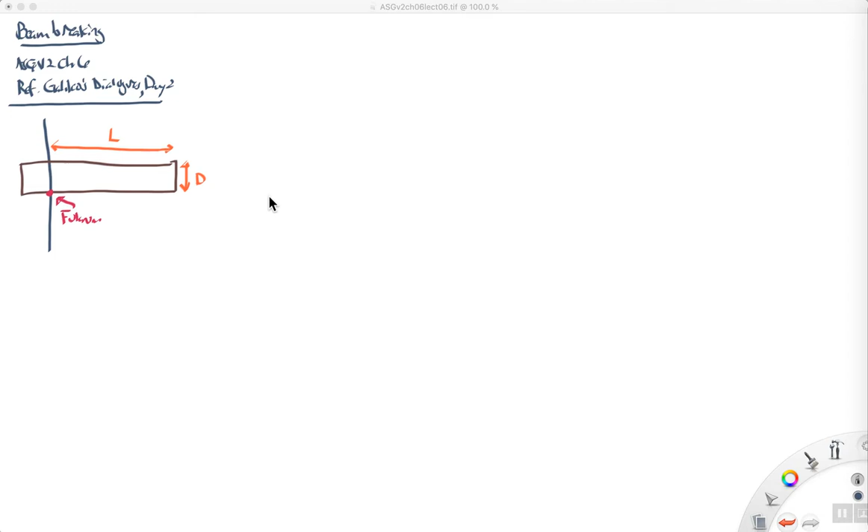So I've reproduced part of this diagram here where I show a beam that is sticking out of a wall. So here's our wall. Right? And you might think of this as being cemented into the wall. This is a beam that's sticking out. And we might imagine applying a transverse force to the wall. So imagine applying a downward force right here, a transverse force to the wall.

And if we think about this as producing a moment, so the distance from the fulcrum, this distance right here from the fulcrum to the point you're applying the force, that is the lever arm, which is just the length L. So we can say that the breaking moment is equal to the transverse force times the lever arm.

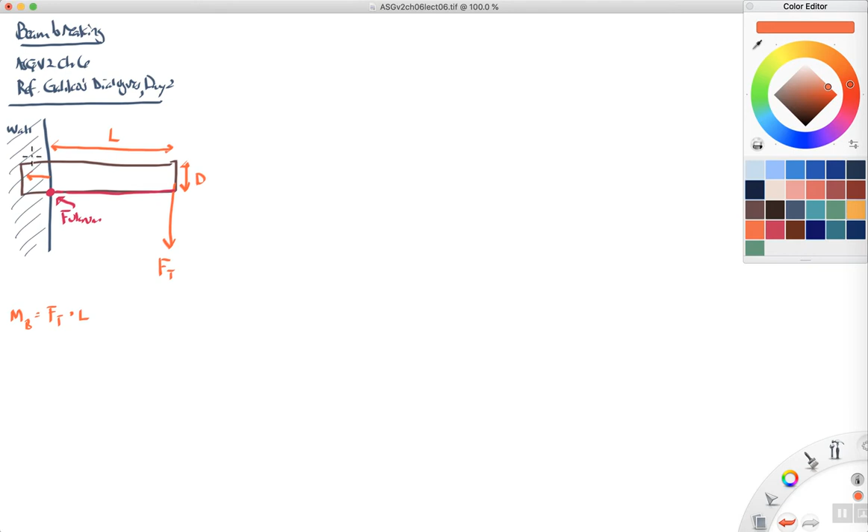And then we can think of the beam having an internal resistance, R, that is trying to hold it together, and the lever arm that it is working with goes from the fulcrum up to the point of application of this resistive force. And so the supporting moment is equal to R times d over 2.

And what's going to happen as this transverse force is increased larger and larger, this resistance meets it. Basically, it increases so as to meet it, but it can only get to some maximum resistance. And because the diameter doesn't change, that means that there's going to be some maximum supporting moment that the resistive force can apply. And so if the breaking moment ever exceeds the supporting moment, then the beam breaks.

And it will rotate, it will then fall down in this direction, it will rotate down that way. So that will be the breaking that happens, okay? All right, so that's where we were last time. Now, let's go on to some of Galileo's propositions. Okay, so let's look at proposition 1.

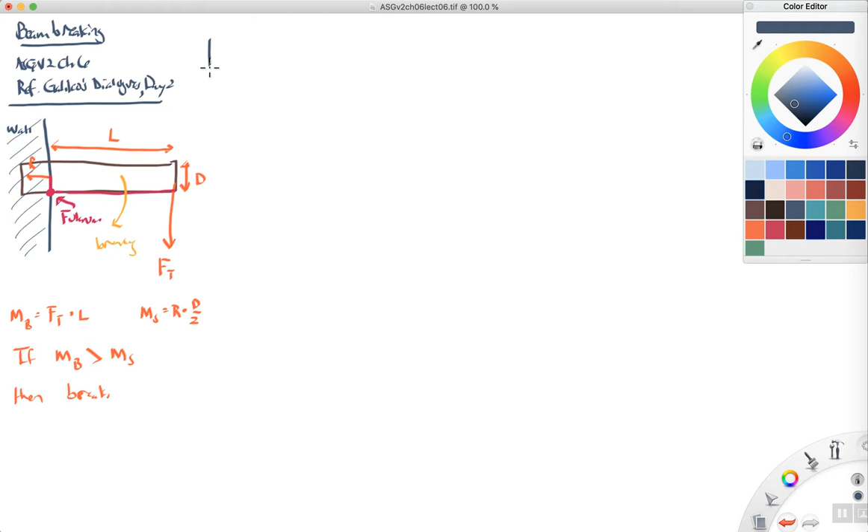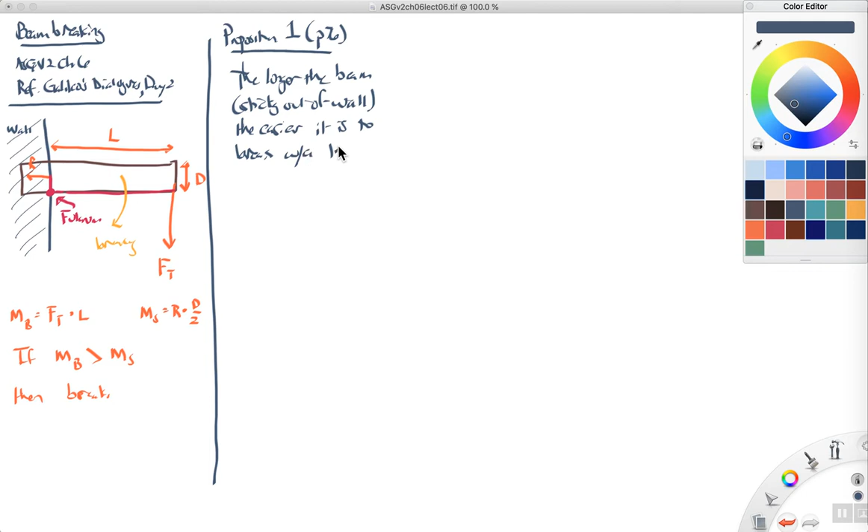Proposition 1, and this is, if I remember correctly, about page 76. I don't have the text right in front of me. Proposition 1. And what he says here, these are not the exact words he uses, but I'll put it into my own words. So he says the longer the beam that is sticking out of the wall, the easier it is to break with a transverse force, like we've been considering.

Okay, that might sound intuitively correct to you, right? Keep in mind that you've been alive for however many years now, and you've been watching the world for all those years. And so the fact is you do have some intuitions about the way things work. And you can probably imagine that if you have some stick sticking out of a wall, the longer it is, the easier it's going to be to break it. Now what Galileo is trying to do is provide some tighter geometrical reasoning for why this is the case.

Well, let's go back to this idea right here. When the breaking moment exceeds the supporting moment, then it breaks. So if the breaking moment is bigger than the supporting moment, then it breaks. Well, what is the breaking moment? We already calculated that. It's just the transverse force you're applying times the length. And so what is the supporting moment? Let's make that an S. It's the resistive force times d over 2, right?

Let's rearrange this formula a bit. Let's move the L to the other side so that when the transverse force is greater than R times the diameter divided by 2L, then it breaks, okay? So if the transverse force is greater than whatever the maximum resistance that it can exert times the diameter divided by 2L. Now, here's the thing to notice about this formula.

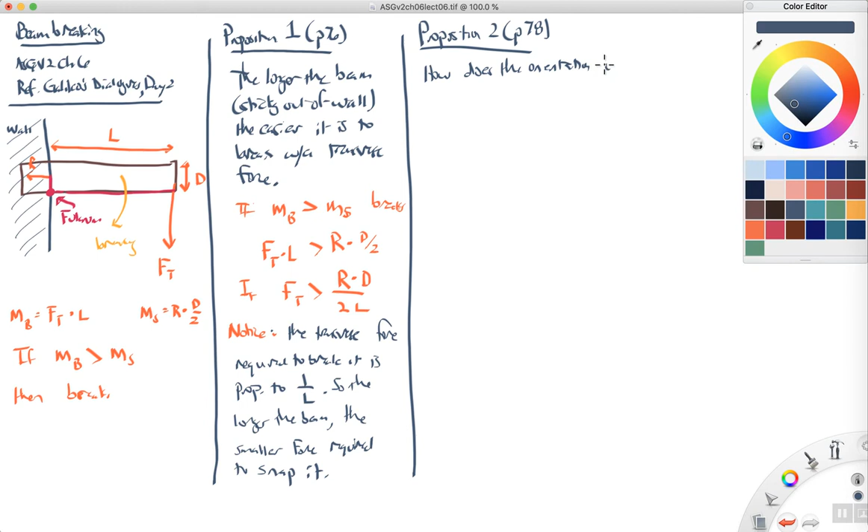The orientation of a board, let's move this over to here, projecting from a wall, from a vertical wall, just like the other one, affect the ease with which it breaks. So I'll draw some pictures.

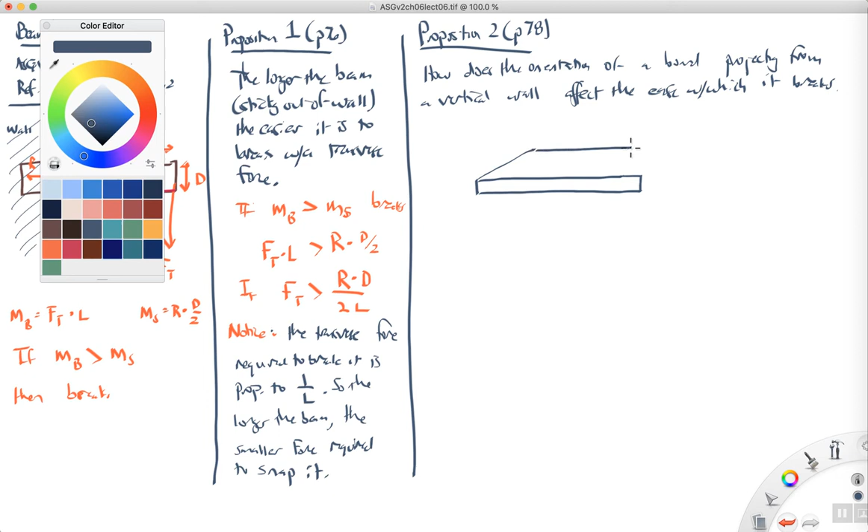So you might imagine, first of all, having a board sticking out in this orientation. I'm intentionally making it kind of a thin board. Okay, so imagine that's the board, and here's the wall from which it is sticking out. And let's suppose this is orientation 1. It's kind of like a diving board sticking out of the wall.

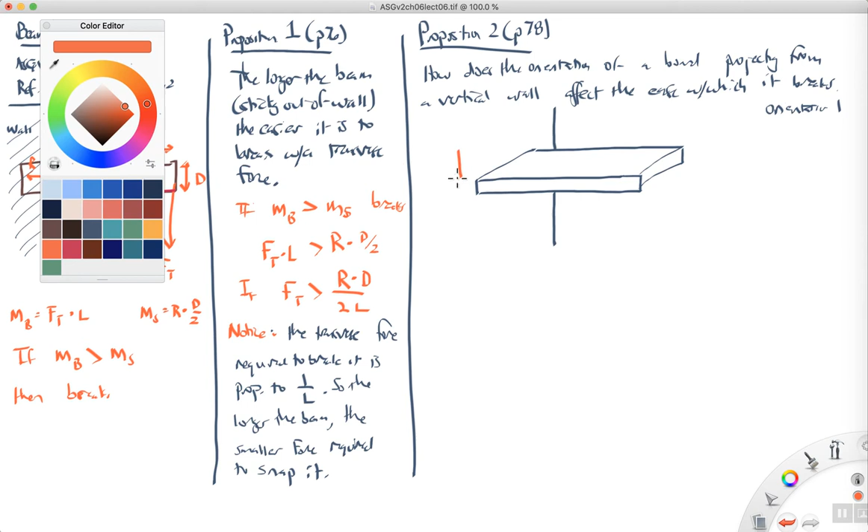And let me put some dimensions on here. So the thickness of the board in this direction, we'll call that D1. The length of the board from there to there, we'll call that length of board 1. And let's suppose we then apply a transverse force down here. We'll call this force 1. That's a transverse force. Of course, I didn't draw the back end of the board. This is the part that's sticking into the wall.

And back here you have the resistive force with which it's being supported by the part of the board that is inside of the wall. So maybe I should draw a little bit back here. There's some board sticking into the wall, and that resistive force is what's holding the part that's sticking out of the wall to the part that's sticking in the wall. Okay, so that's case 1, or orientation 1.

Now what about orientation 2? If you took the exact same board, but instead of orienting it horizontally, let's suppose you were to orient it vertically, like this. It's supposed to be the same board. I hope I make it look about the same. Okay, and this is the part then again that's in the wall.

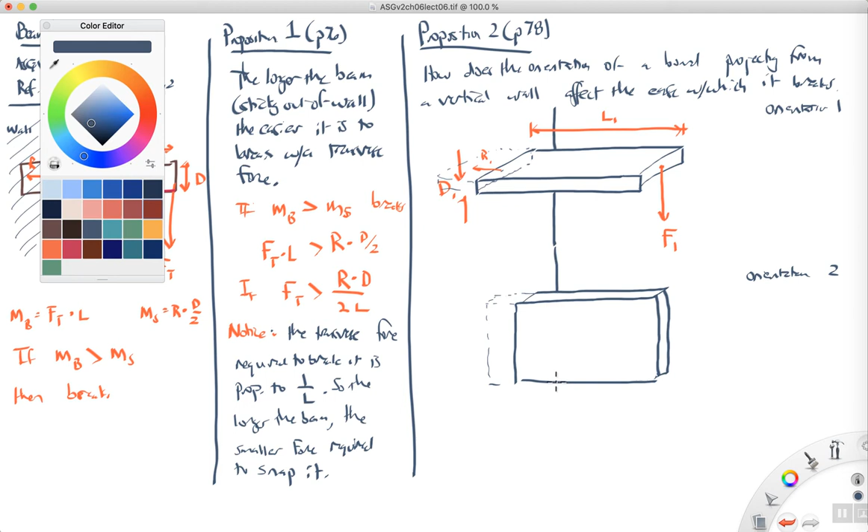Okay, same board. So now the dimension, I guess the thickness right here. Thickness here, again we have thickness right here. Whoops, I guess I want to get rid of that because I don't even want to emphasize that. That doesn't matter.

Now we have D2, that thickness right there, which would have been the width of it over here, but now it's the height of it, okay? And here we have length 2, which is exactly the same as length 1, so these are the same, okay?

And now we apply a force, a transverse force right here. And the question is, which one do you think is going to break more easily? Is the force 1 required to break this beam going to be bigger or less than the force 2 required to break this beam? And I suspect that you probably already know the answer to this, that it's going to be much easier to break this beam than this beam, even though it's the exact same beam, they're just oriented in different ways. So why?

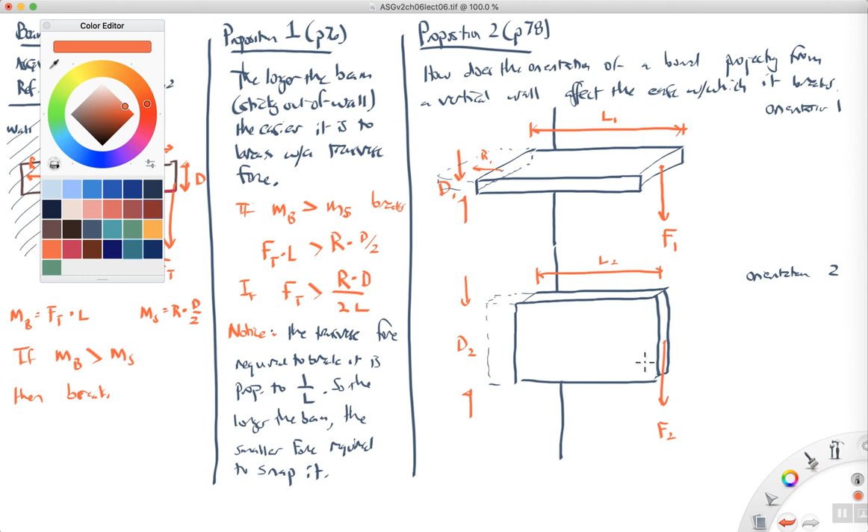Why is it that it's easier to break this beam than to break this beam? Well, let's see if we can figure out why it's easier. So remember here, we came up with a formula for the transverse force required to break a beam. It goes as the longitudinal resistance, R, times the diameter, the thickness, divided by the length. Okay, so if the force exceeds that, then the beam breaks.

So let's compare force 1, I'll write it up here, the force required to break beam 1, to force 2, the force required to break beam 2. So this right here is required to break beam 2, and this one is the force required to break beam 1. Of course, it's the same beam, they're just in orientation 1 and orientation 2.

So let's find the formula F1. It's just resistance in case 1 times the diameter in case 1 divided by twice the length in case 1. And force 2 is resistance in case 2 times the diameter in case 2 divided by twice the length in case 2. Okay, I know this is getting a little bit messy. Let's go down here where I have a little more room.

Force 1 is to force 2, like this. Well, R1 and R2, I forgot to draw R2 in here. That's the longitudinal resistance. That is the strength of this beam to be coherent to the part inside of the wall. Well, it's the exact same beam, so R1 and R2 are going to be the same. So these two are going to just cancel each other out. Notice also that you've got a 2 in the denominator of both cases. Those are going to cancel each other out. R1 and R2 cancel each other, 2 and 2.

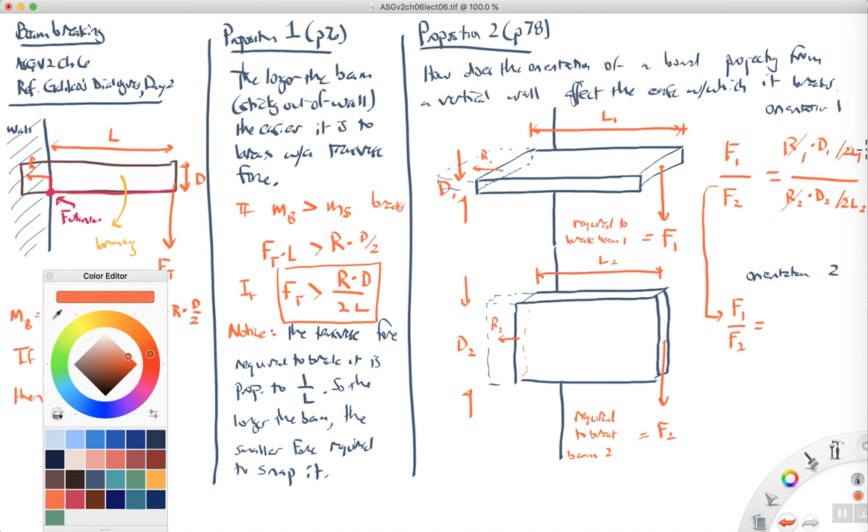What about L1 and L2? Those are the same. They stick out of the wall the same distance. So those two are going to cancel each other out. But notice that D1, the thickness here, and D2, the thickness there, are different. So let's write that as D1 over D2. Everything else canceled out. So notice that because D2 is much larger than D1, force 2 is going to be much larger than force 1. That is, it's going to be much harder to break beam 2 than beam 1.

Why is that? Well, you can kind of see it here because this resistance is acting with a larger lever arm because of the height of the beam than this resistance. Over here, that resistance doesn't provide a very big supporting torque because it's got a small lever arm from the line where the fulcrum is. So this is the fulcrum line, I guess.

And that resistance only takes advantage of D1 over 2 as the lever arm, whereas this one, the fulcrum line, once again is right here about which it's trying to rotate. This is the lever arm. It's got a much longer lever arm, so this resistance, I guess, is more efficient at holding it up, right? So it's going to take a bigger force to break it, because D2 is bigger than D1.

Okay, so that gives us once again the law of the lever, and using the law of the lever provides a way of understanding some things that are probably intuitively clear to you, but maybe you haven't thought about this in the kind of geometrical way that Galileo is using here.